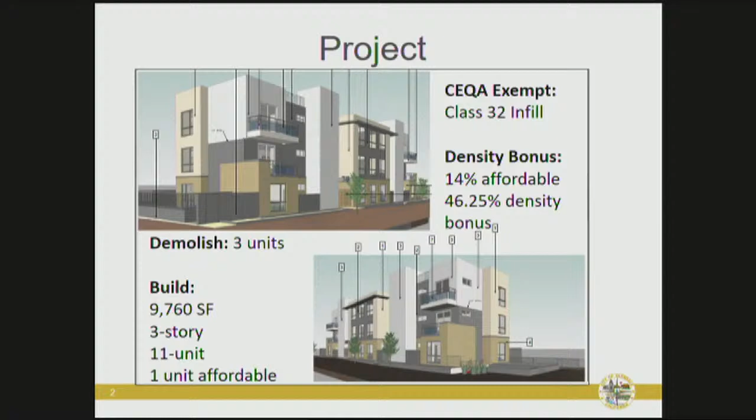In terms of covering the entire lot area? Right. The only development is in that, I guess it would be eastern portion. There were some permits for, I think, a single-family home and a garage at some point elsewhere on the site. Oh, okay.

Okay. The site plan features underground parking access along Jackson Street with ground level building access along California Avenue, with landscaping along the street sides and additional landscaping and common open space at the rear of the building, as you can see in green on this slide. And as you can also see, the building's pushed out to the street along California Avenue, but stepped back further along the other sides.

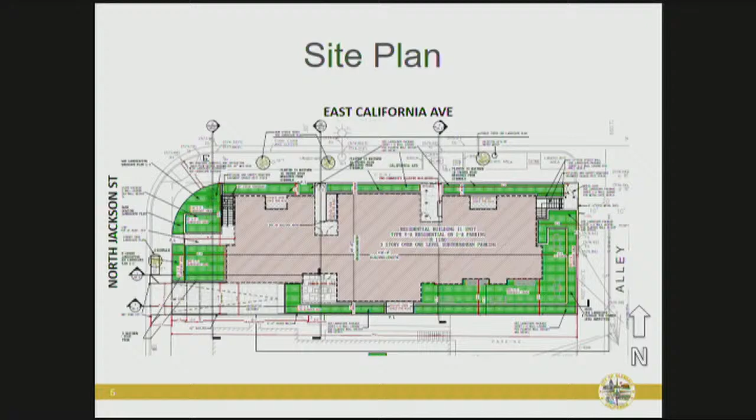The underground parking garage features 14 parking spaces, 9 which are accessible and 5 which are tandem, and also 4 bicycle parking spaces, elevator access, and various rooms for trash and equipment. The first floor plan shows the same features as the site plan, but it shows the room layout and the elevator access. The second floor plan shows a somewhat smaller building outline compared to the first floor, which reflects the increased setbacks as the building height increases. On the third floor plan, there's a large common area open space, a rooftop deck, located here.

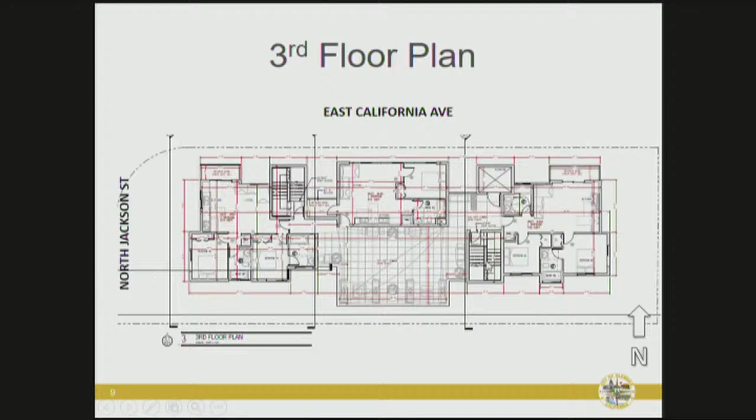And this is the roof plan that shows where rooftop equipment will be located. And the gray areas are actually not part of the roof plan. They're open to below. So this helps you see how the massing is decreasing as the building height goes up.

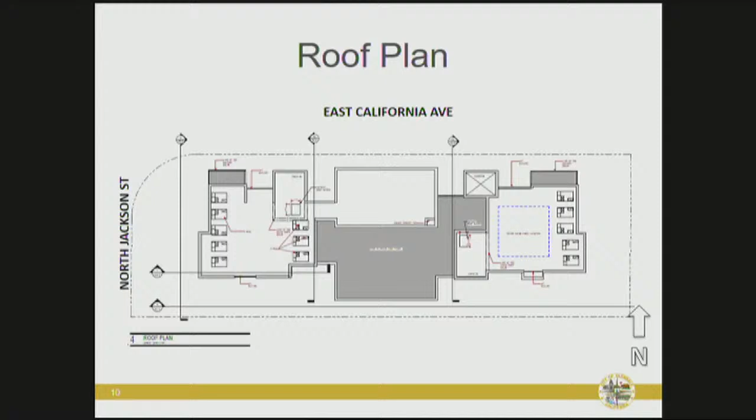The elevations further show the variation in building height, as you can see along the top of the building, and the general massing of the building. These are the north and south elevations here. So this is the elevation that you would see from California, and this is what would be facing the apartment building to the south. These are the east and west elevations. The east elevation faces the alley, and the west elevation faces Jackson Street.

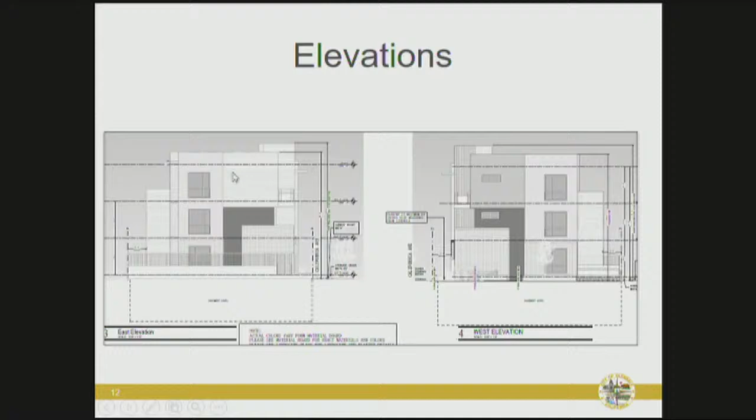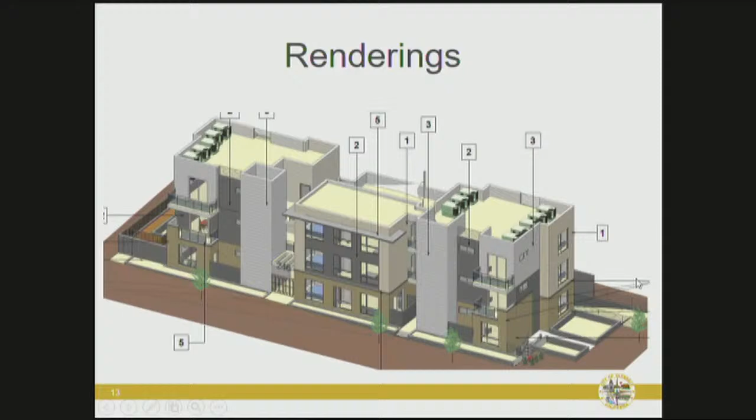This is a bird's eye rendering showing the overall massing of the building with varying heights, facade planes, setbacks, etc. This view is taken from the intersection looking southeast. So this is California, and this is Jackson. And this view is pointing northeast from the south side of the building. The driveway entrance to the subterranean garage is located at the lower left, which faces Jackson Street. And this is the rooftop deck area that I had mentioned earlier.

The surrounding buildings near the project site are 1- and 2-story multifamily buildings, with the immediately adjacent building shown on this slide. The hearing officer already summarized the comments received from the other departments. To reiterate, most of them were standard comments received for similar projects like this. A couple notable comments were for the applicant to provide a street dedication at the corner for an accessible sidewalk ramp and 4 new street trees.

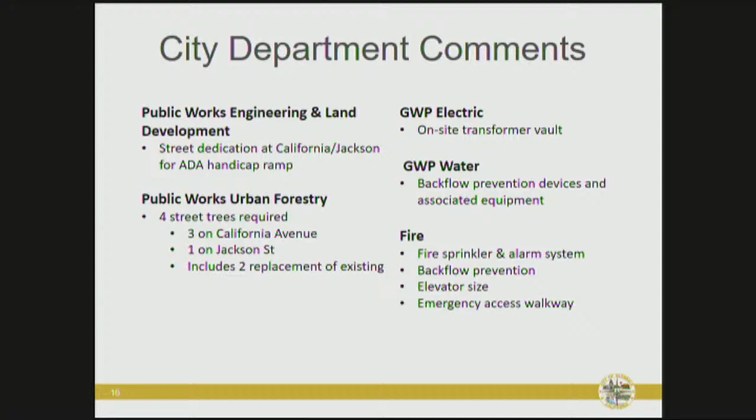In terms of parking, per state density bonus law, the city shall not require parking spaces in excess of 1/2 parking space per unit, inclusive of handicapped and guest parking, if the project is located within 1/2 mile of a major transit stop and there is unobstructed access from the housing development to that stop. A major transit stop is defined as the intersection of 2 or more major bus routes with a frequency of service interval of 15 minutes or less during the morning and afternoon peak commute periods.

The applicant has demonstrated the project qualifies for this parking standard because the project is located 0.4 miles from the intersection of North Glendale Avenue and East Broadway. And this intersection is served by the Beeline Route 4, which runs north-south and east-west between the Glendale Galleria and the Glendale Transportation Center, which is the central transportation hub for the city of Glendale, and Metro Bus Route 180-181, which is a regional route running primarily east-west from Pasadena to Hollywood. Both lines have a service interval of less than 15 minutes during peak commute periods of 7 to 9 a.m. and 4 to 6 p.m.

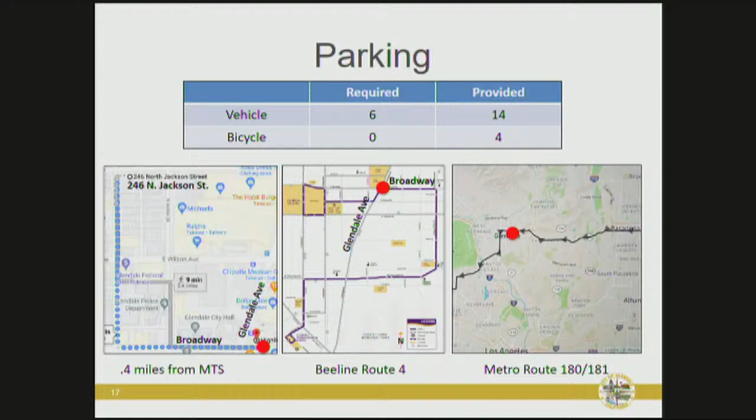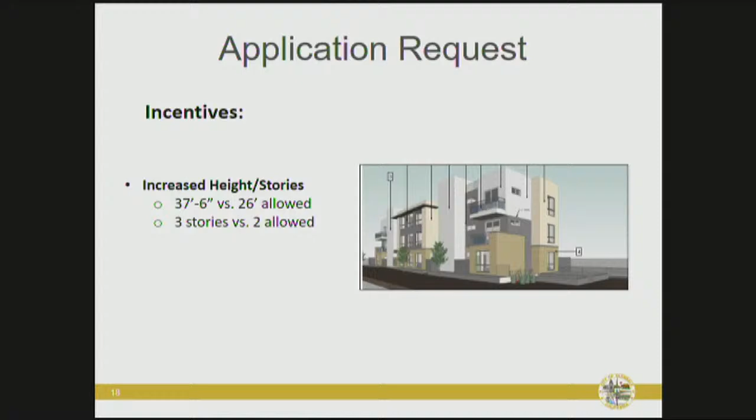Therefore, under this parking provision, the project is required to provide 6 parking spaces, which equates to 1/2 space times 11 units, which is 5.5, rounded up to 6. The project is providing more than the required parking spaces. It's providing 14 total, 9 of which are accessible and 5 which are tandem. And in addition, they are voluntarily providing 4 bicycle parking spaces. Ms. Pruitt, so the 0.5 parking spaces required by the state, that's for all the units. It's not just the affordable unit, right? Correct. Yeah.

The application request is for density bonus review to grant incentives and waivers from code requirements in exchange for the provision of affordable housing. The difference between incentives and waivers is the required findings of fact. For incentives, the city must grant the request unless it can prove certain facts are true. For waivers, the city must grant the request if certain facts are shown to be true. So the density bonus request includes two incentive requests. The first is to allow the project to exceed the maximum code allowed height and number of stories, specifically 37.5 feet and 3 stories, whereas code allows 26 feet and 2 stories.

The second incentive request is to provide less than the code required minimum and average setbacks, primarily for the underground parking level and street setbacks. The underground parking level is required to have a minimum 20-foot street front and 5-foot street side setback, whereas the project proposes to provide a 4-foot 4-inch street front setback and a 4-inch street side setback. For the above-ground setbacks, the project proposes a street front setback of 20 feet on the second and third floors, whereas code requires a minimum of 23 feet.

For the above-ground street side setbacks, the project proposes a 4-foot setback, whereas code requires 5 feet on the first floor, 8 feet on the second floor, and 11 feet on the third floor. The setback averages are similarly several feet short of the requirement. For the interior setback, which is the side that faces the adjacent apartment building, only the second floor on the south side doesn't meet the required 8-foot setback. Instead, it has a 5-foot setback.

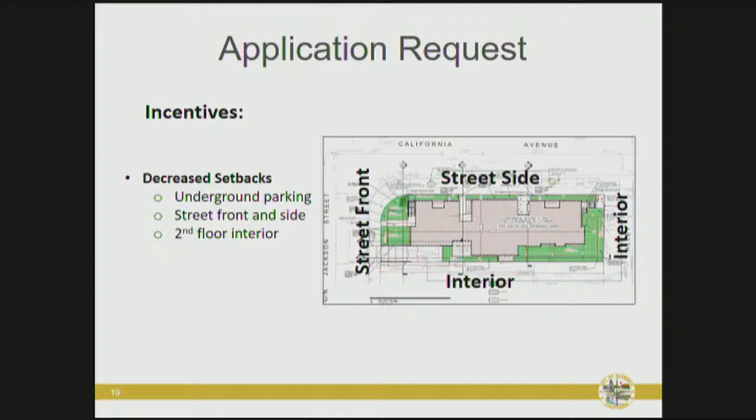The density bonus request also includes two waivers. The first is to allow the project to exceed the maximum allowed floor area ratio, proposing a floor area ratio of 1.32, which is 9,760 square feet, whereas code allows 1.2, which is 8,904 square feet. The second waiver request is to provide less than the minimum required unit size, proposing 2 units with 768 square feet instead of the code required 800 square feet, and 5 units with 574 square feet instead of the code required 600 square feet.

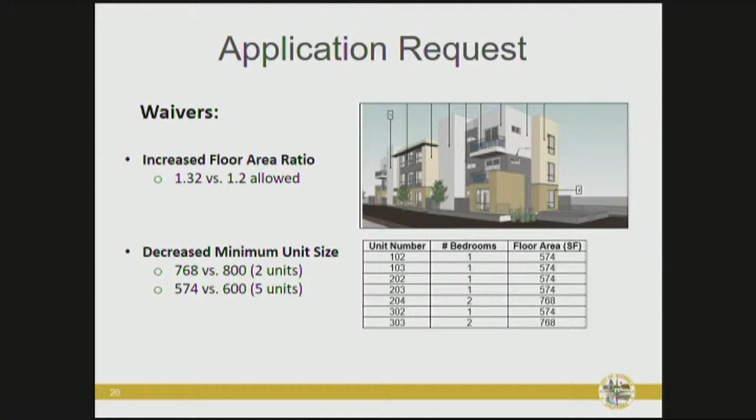The project doesn't appear to have a specific adverse impact upon the public health and safety or physical environment because the existing buildings to be demolished aren't identified as historic resources. The project is exempt from the California Environmental Quality Act, and it is designed to comply with the city's various municipal code standards relating to public health and safety.

Further, certain features of the project actually help offset the increased height and stories and reduced setbacks. Although the requested height is 37.5 feet, the predominant building height is actually 35 feet, which slightly reduces the overall massing. The reduced setbacks are mainly on the street-facing sides, which aren't adjacent to other buildings and therefore allow more space, light, and air. The building also uses a variation in massing and materials to help reduce the apparent size of the building. No known state or federal laws would be contrary to the granting of these incentives. Therefore, there is no substantial evidence that the findings of fact can be made, and therefore the incentives must be granted.

Based on feedback from staff and the urban design studio, it was important to pull the parking garage back from Jackson and from the corner to provide for on-grade lush landscaping. The lighter green are planter boxes, also placed there because of the urban design studio's comments on integrating landscaping along the Jackson and California right-of-ways. Is there a reason why those areas can't be in-ground?

Yes, as previously indicated, we're providing 8 more parking spots than required, so we've pushed the parking structure closer to the Jackson property line. Oh, okay. But at an added cost, and it's a big cost to the project, based on feedback from the urban design studio, we've lowered the podium of the entire project to allow for landscaping along the California right-of-way. And then we further dropped the front setback on Jackson and that landscape area to provide for 24-inch landscape planters. The dark green are possibly LID planters.

If we could use a drywell in the very corner, then those LID planters will drop in height. If not, they will be higher in height and could accommodate larger trees, et cetera. And is that the area that's sort of the olive green color? Correct. And so the common open spaces are on the right side, at the southeast corner of the property. As you can see, there's amenities there with workstations, et cetera.

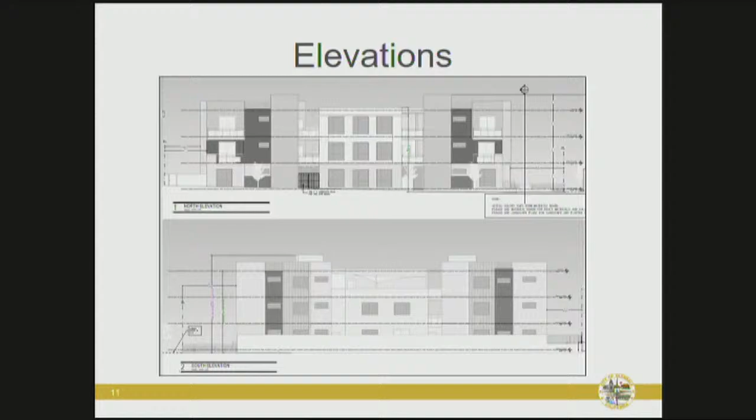Very good question. Ms. Britt, do you have those three-dimensional models that you could put up? Perfect. If you would, go back to this one. And so, Mr. Kiesel, if you notice the middle portion on California, which is closer to you, those parapets have been dropped to the bare minimum. Yeah, I see that. And with the A, B, and C motif, on the ends we've raised those parapets a few feet, but provided railings as a relief. If you look closely, you'll see railings within the parapets. And we've moved the HVAC equipment closer to the edges.

Now, can we lower those parapets? Absolutely. But what we'll need to do is screen the equipment with metal screening, and that is more unsightly than the articulation of the building, in my opinion. But if that's something that the city or the Urban Design Studio desires, we could absolutely work with them on that. Okay.

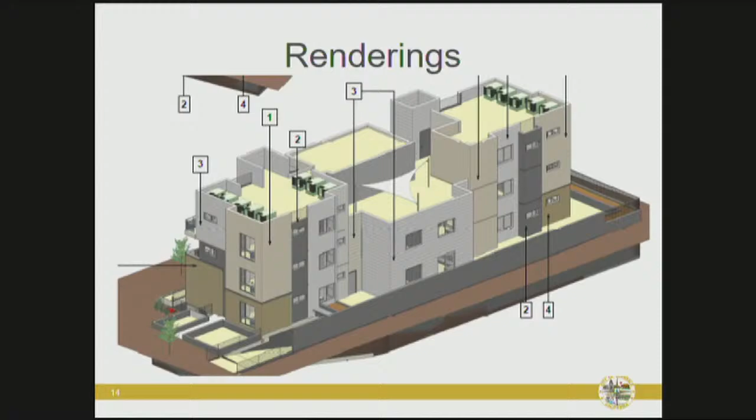I had a question about the common open space, but I think you addressed it. Two on the ground level, the first floor. And the third would be, right, where, actually, I guess, keep the slide up. The one, it was a small common open space right where that door is toward the driveway. Is that... Yeah. If I may, we have detailed landscape drawings. Okay. Which show the common area amenities.

Okay, is there a way we could put the landscape drawings up by any chance? Sheet L1, L2, L3? They were the last few pages. Well, they would be part of the drawings that were uploaded on the city's website. Why don't we do this? I have hard copies if I could show. You can do that, but if you can put up the first floor plan, that would be great.

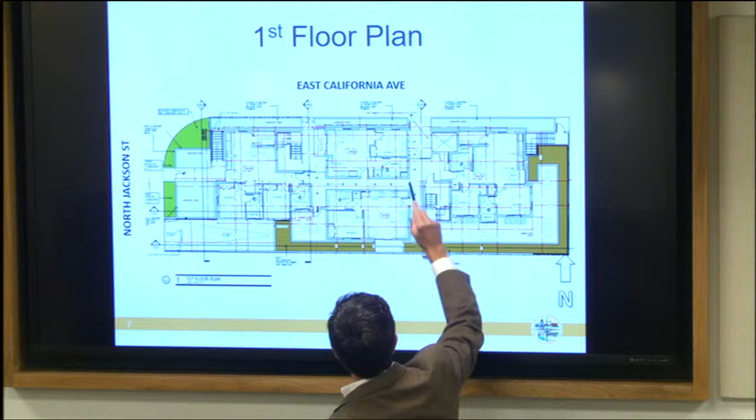Okay, so Art, could you come up and show, just point the two areas of the common open space? Because I think I know what you're referring to. Got it, okay. Yep. Okay. Right. Third floor is this entire area on the third floor. We've gotten rid of this unit and made this entire area common open space to allow light and air onto the building. Got it, okay.

When he stands over there, there's no sound coming through. Oh, sorry. There's a wireless mic, if you want to do that again. Okay. Just real quick, thanks. I didn't consider that. We're so used to the other room, right? I know. Where the drawings are up and it's easier. Yes, please. Oh, is it on? There seems to be a button at the bottom. Maybe that doesn't.

Ms. Pruitt, can you maybe just summarize what Mr. Simonian said? He was talking about there being common open space in this area and a small amount here. Okay, and that small amount was for a quiet area for conference calls, and that's what Mr. Simonian said. Right. And then there is one on the third floor, which I was clear on, so.

Okay, if you could go over each concession and waiver and just sort of point out where they're being requested, et cetera, I think that would be helpful. And then, Ms. Pruitt, if you could sort of follow along with the floor plan or the elevations, just to make it as clear as possible, that would be appreciated. Okay.

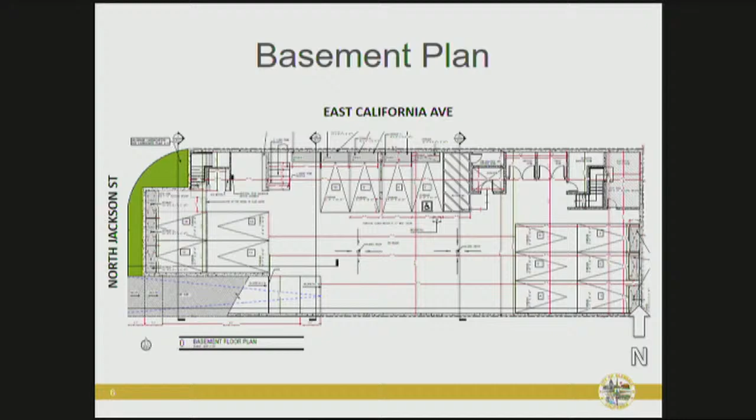And so in that previous plan, the tandem spots on the left side of the parking garage are exactly where that slab is dropping. We could easily not provide those parking spots and provide the 20-foot setback at garage level, but we would have less parking and more of an impact to the neighborhood, and we didn't think that was responsible. Okay. On the second level, where are you deviating from setback standards?

It might be easier to break it down between the interior south and the street side north. However you want to do it, yeah. Okay. And so on the building ground level, along Jackson, we meet the 20-foot minimum. Actually, Ms. Pruitt, can you go back to the first level? Sorry. This is the first floor. Is this the floor that you're referring to right now? At the moment, yes.

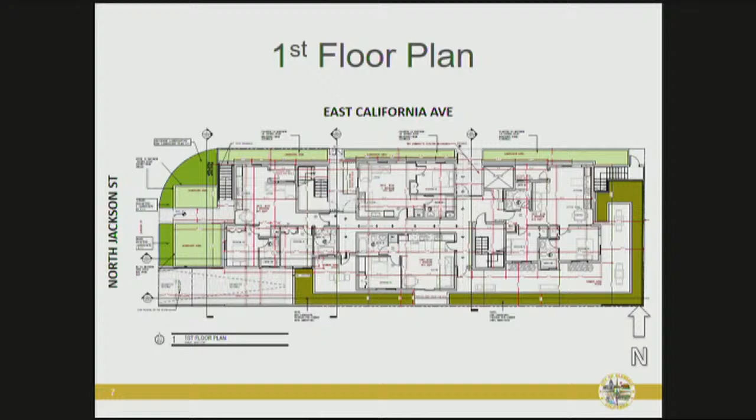And so on the left side, the front setback along Jackson, that is a 20-foot minimum setback, so there's no deviation there on the minimum. On the upper levels, level 2, which would be the next slide, I assume, the second and third floors do meet the average front setback requirements, but we're short on the minimum because of the wedding cake design concept of the development standards.

Yeah, it looks like that. If you're looking along Jackson, the bedroom pops out a little bit. We've created undulation in the facade. Is that the minimum deviation? Correct. But the average is okay because it goes all the way back to that middle unit.

Correct. And so there's deep relief. And so the averages of the upper levels are met, whereas the minimums deviate slightly. On the interior south setback on the second floor, since we're talking about the second floor and that's where we're at, we have a minimum of 5 feet, an average of 11 foot 10, from the standards of a minimum of 8 feet and an average of 11. So again, we're above the average, but we're shy of the minimum. And again, it looks like it's because of that middle unit.

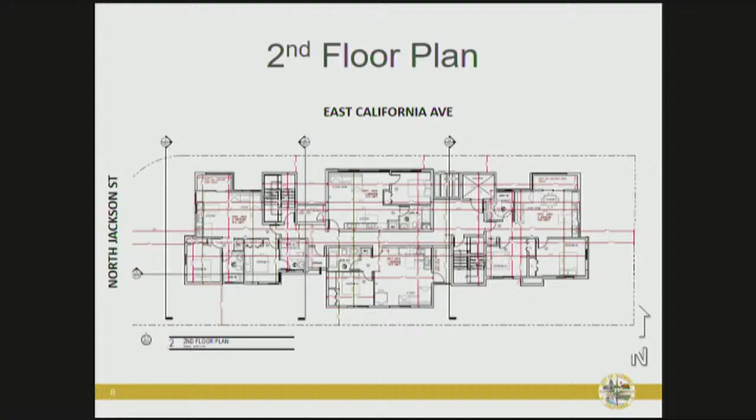This concludes our presentation, and we are, of course, available to answer any questions you may have and any questions that come up as the public provides additional comments. Okay. One last question. Have you had a chance to look at the draft conditions of approval? Yes. Do you have any concerns or questions about them? Nope, we thought it was well-written, very concise, and we could integrate all those conditions into our project.

Okay. Ms. Pruitt, do we have any callers that want to speak? We do, at this time, we have one caller. Okay. If you could get them through, that would be great. All right. Good morning, Catherine. You are live on the air with the Planning Hearing Officer. Please make sure to state your name, and you have 3 minutes to provide your comments. Catherine, are you there? She was on hold for 20 minutes, so we can give her some time. All right. Are we doing everything properly there? I believe so. Okay.

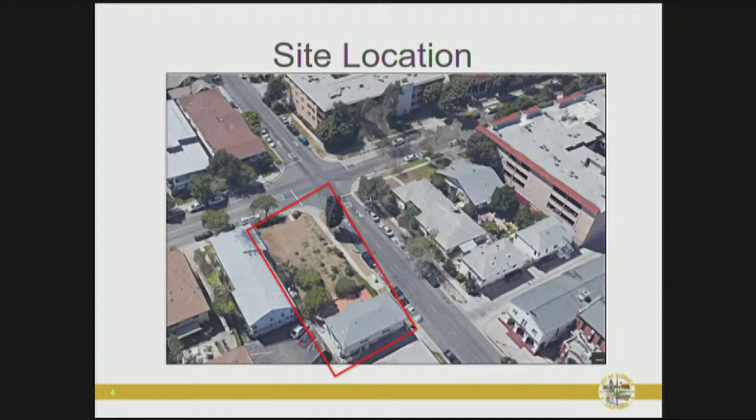And so we're proud of this project, and we look forward to further fine-tuning it with the design review board process, working with the urban design team, with staff, and of course the community as well. Thank you. Okay, great. With that, I will close the public hearing. This hearing is officially closed. I am going to take the case under submission, and thank you, applicant team, for showing up, and thank you to the callers and the letter writers for writing in. Thanks. This hearing is now closed.